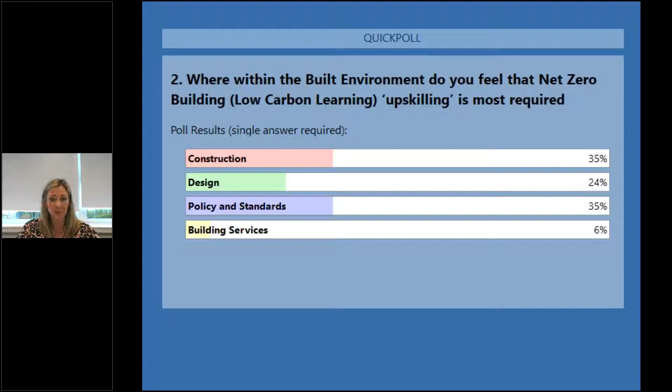So now it's time for our next poll question. Where within the built environment do you feel that net zero building, low carbon learning, upskilling is most required? Okay, and that's interesting. Construction, policy and standards, both at 35%, building services 6%. Okay.

So next we're going to hear from Duncan Smith. Duncan has over 30 years experience in construction and the energy industry, working within both public and private sectors in the UK, Europe and Australia. He's worked with several companies, including Scottish Power, and several local authorities, including Renfrewshire Council. Duncan holds qualifications in site management, residential surveying and construction. And now Duncan also works for AECB and has devoted much of his career to finding energy efficiency solutions in social housing and local authorities.

So, welcome, Duncan. Hi, thanks very much for having me. It's nice to be here. I'm just going to fly through some of these slides and see if between myself and Sara and Trish we can maybe have a wee bit more of a chat around some of the topics we've been discussing. But just to give you a wee introduction about me, I'm the Chief Operating Officer as well as External Affairs Director at the AECB. And it makes me feel very old when somebody says 30 years experience. I have to look at the grey hairs coming in.

But my background is in a mixture of construction, retrofit and energy. So I really do have, I suppose, a passion for retrofit and how we upgrade the buildings that we have. I've been involved in policy development, working with Scottish Government as well as the United Nations on developing policies around retrofit, and been part of lots of different working groups. What I want to try and do today is take a wee bit more of a higher level approach in terms of the connection between the built environment, fabric first, climate change and fuel poverty, and just kind of frame the argument and start to join some dots.

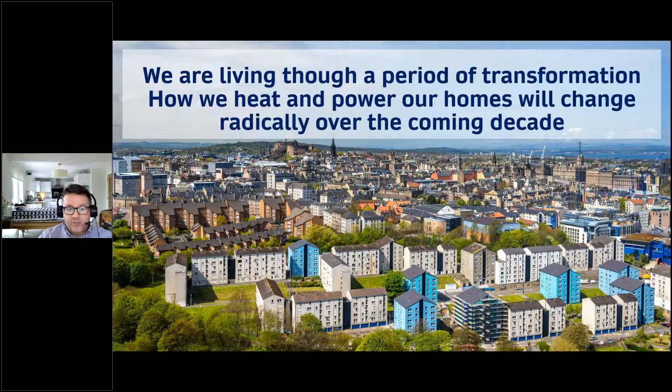I think it's fair to say we're going to live over a period of significant radical change in terms of how we heat and power our buildings over the coming decade and beyond. And I think it's worthwhile just to pause and reflect on some of the changes that we're going to have to make. It will be quite a radical transformation and there will be challenges in that, but also opportunities.

And the reason that I want to tie in climate change and the built environment, as I'll show in some slides coming up, is if we don't embrace the challenge we have, if we don't meet our climate change objectives, we will create a much warmer, much less hospitable climate for our children. And it is a really important point to link the built environment and climate change.

And the reason I like this particular slide here is a door that we can walk through. It's a metaphorical door that if we get it right, we can have a much better future. But if we get it wrong, there's some real problems that we face, and not just people watching this webinar just now, but our kids and future generations.

And to tie in the built environment and climate change, I just want to do some key facts to, again, frame the argument. About 80% of the homes that will be around in 2050, when some of the targets are due, have already been built. So they're already here, we're already living in them. And we can't build our way out of climate change. By that I mean we can't build new homes to replace the ones we already have. So we've got to tackle what's here.

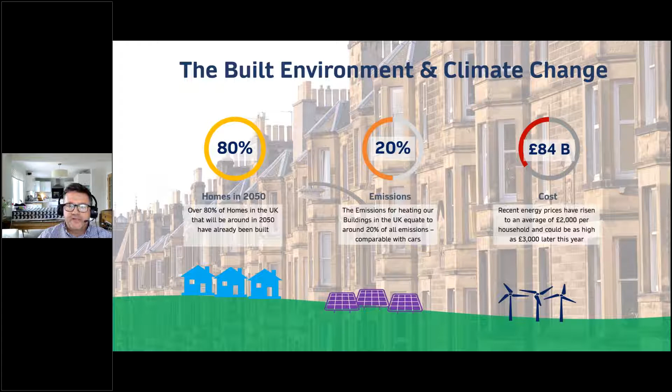Directly 20% of emissions come from heat and hot water from our buildings. So a significant proportion of carbon comes from how we heat and power our homes, and that's comparable with cars. I'll talk a wee bit later on about the cost, because there is a social cost to this as well as environmental. But what's our government doing?

Our government here in Scotland, in fairness, is pretty progressive. We've got some standards that I've been involved in working with the Scottish Government on for energy efficiency. The main thing that people might be familiar with is EESSH, but also quite a significant drive towards heat pumps and the Heat in Buildings Strategy. HIBS has quite clear directions in terms of 1 million heat pumps by 2030.

And fuel poverty legislation: interestingly, I could be wrong here, but I think throughout the whole of the UK we've actually enshrined in legislation that less than 5% of people should be in fuel poverty by 2040, I think. Fundamentally overarching all of this is Scotland's ambition to become a net zero country, a net zero society, by 2045. That's 5 years ahead of Westminster.

And back to this transition and joining the dots again, looking at some of the policies there, there's a huge amount of homes that will have to be switched from gas to electric or low carbon heat networks, things like district heating. And that's going to require a huge amount of generating capacity, and also how we bring that electricity to our homes through the existing network.

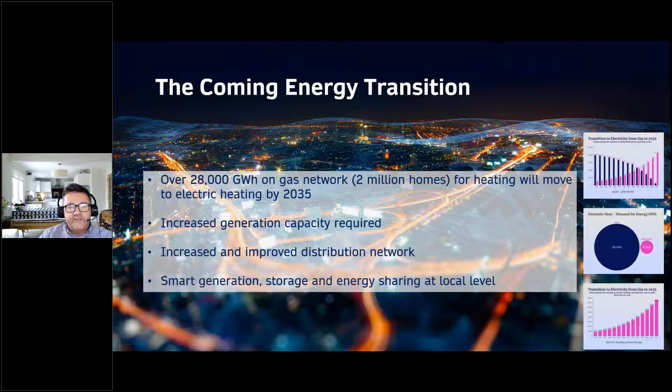But to give you an idea of the scale, if you look at the 2 million homes that will have to be transitioned to a different type of heating from gas, from now to 2035, that's the equivalent of about 12,000 homes per month. So that's the size of a town of, say, Larkhall or Kilwinning or Johnstone, switched every month from gas to some other form of low carbon sustainable heating. So it's a huge challenge, and we'll have to have smarter generating and storage capacities as well. So just to frame again the transition that we're going to have to go through.

But the cost to society just now: what a lot of people will say about some of the topics we discussed, the fabric approach, reducing carbon, reducing demand, is, well, it's expensive, it's costly. How much will this cost us? And I would actually take this back and argue about present day. If you do some very rudimentary figures, you'll see that us Scots spend about £5 billion a year. Our average bills are about £2,000 a year.

And we're looking at 40% of Scots potentially being in fuel poverty in the autumn of this year after the next price increase. It's currently 25%, so from 1 in 4 Scots to potentially 4 in 10 Scots in fuel poverty. So there's a huge social issue as well as a climate issue just now about how we heat our buildings and how we provide sustainable homes.

And in direct relation to the Fabric model, or the Fabric First module that we've developed, our homes here in the UK, here in Scotland, are some of the least efficient, some of the leakiest from an energy perspective in Europe. Higher proportion of flats in Scotland than the rest of the UK, and a proportion of private landlords slightly smaller than the UK, and a little bit more social housing. That's the kind of dynamic.

So, built with different construction materials, different methods, quite old, quite inefficient, and that's some of the properties that we need to treat. Only 20%, actually 18% of our homes were built since 1990. So a real issue with this historic stock, how it was constructed, how it was built.

How do we measure performance? We can talk about this a little bit just now, but I'd be keen to open this up for a debate in the chat. But we measure performance through things like EPCs, how RdSAP can generate those EPCs and design SAP, as well as passive house planning package. So there's tools out there on how we measure buildings. I'm sure some of you will be familiar with all of them.

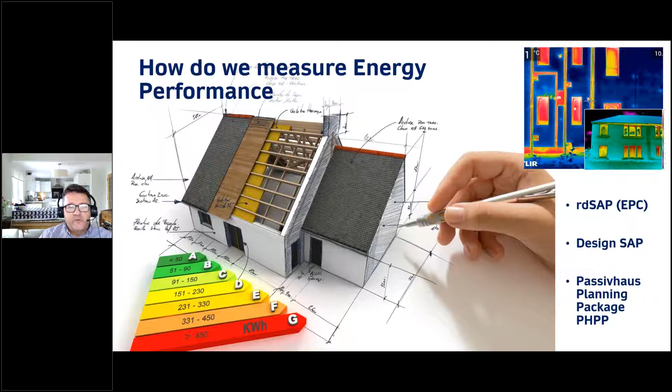But really, how we should be looking at measuring our buildings is through the kilowatt hours per square metre. It's through the demand that our homes need for energy, because only then, if we reduce that, will we fundamentally address the climate issues around the carbon that we emit, as well as the fuel poverty that households have. So sustainable retrofit and sustainable homes is closely tied up in building physics and a fabric first approach and reducing demand, and how we do that through this chart here.

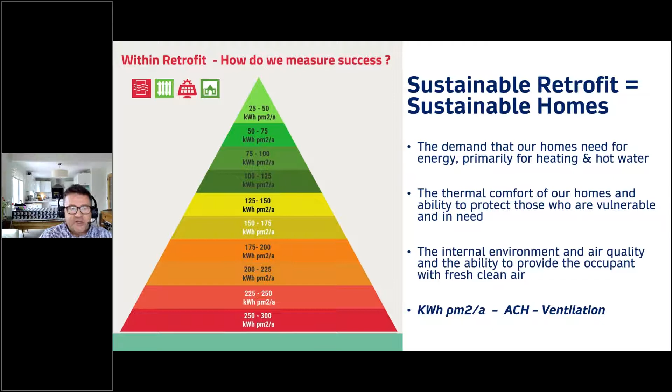And this method really is a future-proofing method because it allows the transition to low-carbon heating or renewables in a way that's sustainable, not just environmentally, but sustainable socially, and that residents won't pay more for renewable heating.

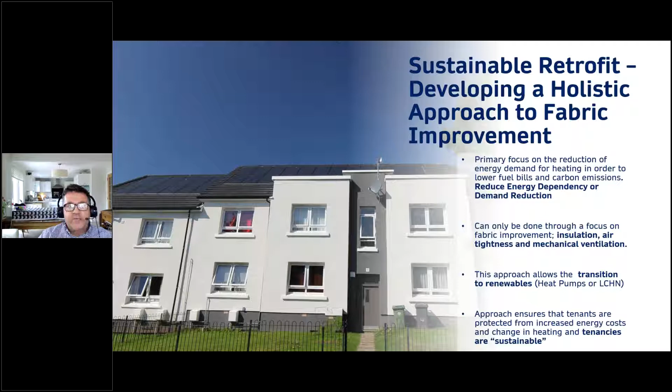And I just want to finish off with a couple of slides because we talk a lot about the challenge, and we look at that through a lens of the difficulties and the problems that we'll face. But I want to again reframe this, because with a fabric first approach, with an approach that significantly reduces the demand that our homes need for heating, we can actually look at the positives about how we can change that challenge into an opportunity to create an economy which is more sophisticated around construction and how that can have an impact on our health.

We live in our homes. If our homes are significantly more energy efficient, healthier, air quality is better, these all have an impact. Of course, it has an impact on the environment through reduced emissions, but also society as well. We can't spend the money that we're spending just now on heating our homes and for it not to have an impact on society. We have an opportunity to move away from spending vast amounts of money on heating our homes to something that's more viable, more sustainable.

So I'm trying to show how we shouldn't look at housing in its own little silo, that it is interconnected into the environment, the economy, health and society. And just to leave you with one quote from Chris Stark, who's the Chief Executive of the Climate Change Committee. In terms of overall climate, if not us, then who? And if not now, then when? I think it's a great quote because I think it's a kind of call to action about how we can all play a part in reducing our energy consumption, our energy demand.

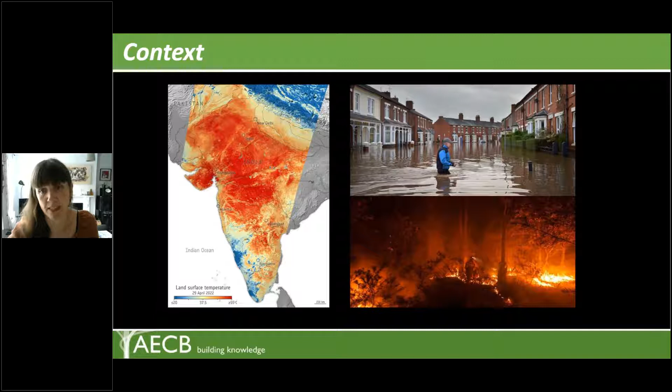What that means is that extreme weather events are becoming more and more commonplace, and anybody who's watching the news right now will know what's happening with heat waves in India, but it's not just other parts of the world where this is happening. This happens here on our doorstep with flooding becoming more of an issue, and also with wildfires that we've seen in Northern Ireland recently.

So what's the national context? Well, we know that the UK won't meet its legally binding targets of net zero by 2050 without near complete decarbonisation of the existing building stock. Lots of organisations, and possibly some of you on the call today, are part of organisations calling for a national retrofit strategy. We need an immense expansion of trades and professionals to meet this challenge. The CLC has put that number at 500,000 roles, and I think the Scottish Government are saying 22,500 roles every year until 2028, so it's no mean feat. But this is where organisations like BEST and the AECB really matter, because they're mobilising all of their abilities and resources and joining forces across the industry to help address the skills and knowledge shortage.

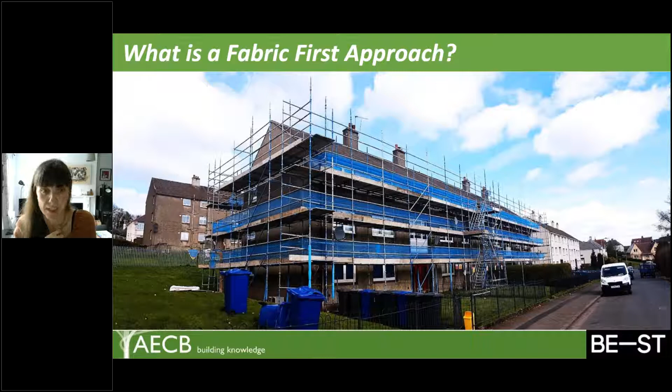And those principles really are about maximizing air tightness, optimizing solar gain, whether that's in new build or in retrofit. There are things that you can do in both scenarios. It's about increasing levels of insulation in the fabric, optimizing natural ventilation, and using the thermal mass of the building fabric. But I really don't want to talk too much about that now, because the course content itself will be really useful, really thorough, and point you to lots of industry documentation and support.

But I think what we'd like to do is just have a discussion more about how we can spread this knowledge as far and as wide as we possibly can, because collaboration is where we've all got to be right now, and we've all got to be able to come together. And if you all in this room, because I do feel like we're speaking to quite a knowledgeable room, know a lot about this, there are a vast number of spaces that BEST are providing. So share it wide and get as many people up to your level of understanding as possible.

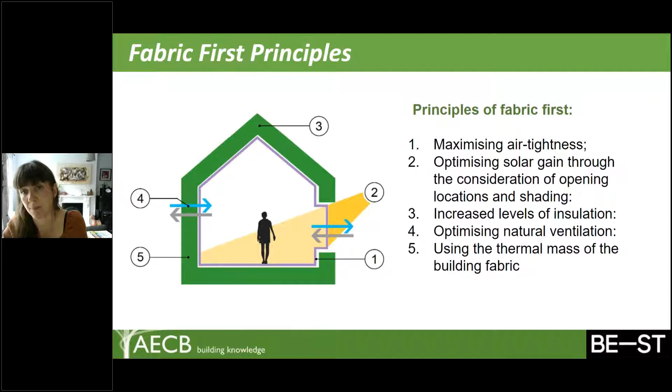We know there's no silver bullet, so we know that it's tricky. We know that there are challenges here, but no more than just any form of construction. So I hope that we can start to talk about this as commonplace as we talk about other challenges across the construction industry. Yeah, so thank you, and I hope we can have some good questions in the conversation now.

Thanks, Sarah. Now, before we go on to the Q&A session, it's time for our final poll of today. So the final poll is, what area of net zero building, low carbon learning would be most valuable to you or your business? Is it fabric first training, sustainable insulation training, mass timber training, carbon accounting standards, or passive house standards?

That's good to see that it's fabric first training. That's good that the relevant people who are on it today are interested in the actual training. As I've said, the training will take place with the module and also practical training at the factory. Now, just to reiterate, the training spaces in the factory are limited. So if you want to come to the practical training day on Wednesday, the 11th of May, you can sign on for it right after the webinar.